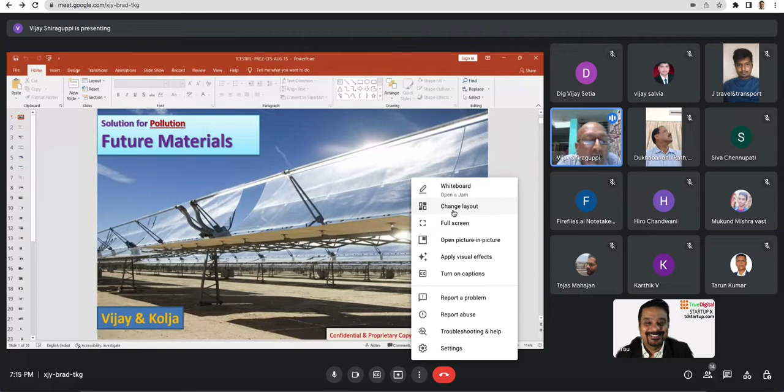Thank you, Sanju, for the introduction today. I'm glad there are three Vijays here today, including me - one is Mr. Digvijay, and one is Mr. Vijay Salvia.

Am I audible? Yes, perfectly all right. Now to start with, we are talking about the global phenomena of the worst kind happening in this world - pollution. So let me not elaborate on that. We have come up with a solution for pollution using future materials.

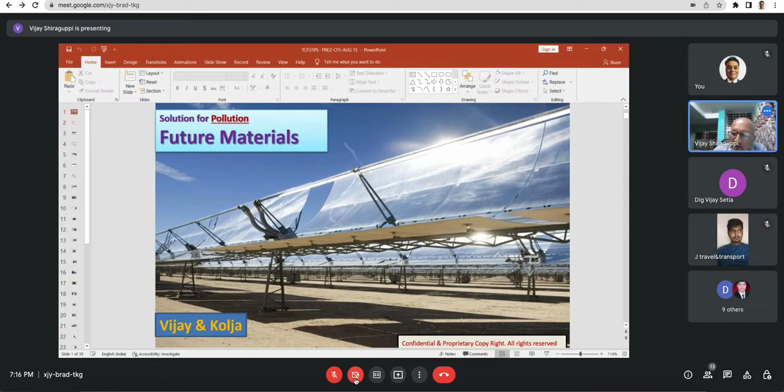So what is the problem? Polluting materials are destroying our planet, which everybody knows, and climate change - we are experiencing it currently. The solution is to reduce and replace with alternative material, natural material, low carbon material. We want it to be a sustainable solution, so we call it a 4P solution, which includes people, planet, pollution, and yet make profit. Then only it will succeed.

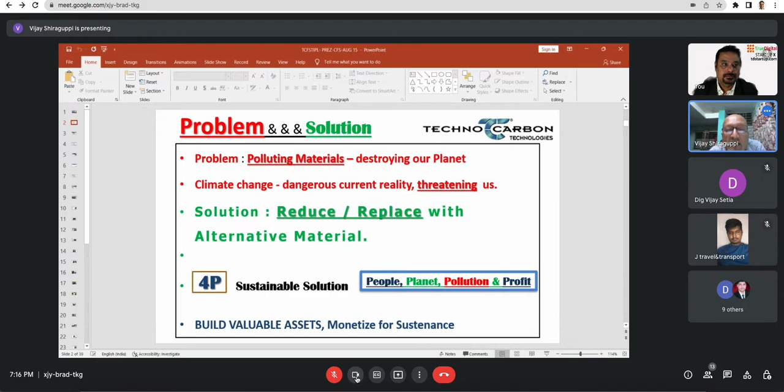So the current agreement is to save our planet, and we have to come up with environmentally friendly, sustainable solutions. We need to reduce and replace globally steel, concrete, aluminum, fossils, oil, coal, and wood with materials that are economical, low carbon, natural, and better. We don't have time now, but we have to realize we don't have an option, and we need time to commercialize.

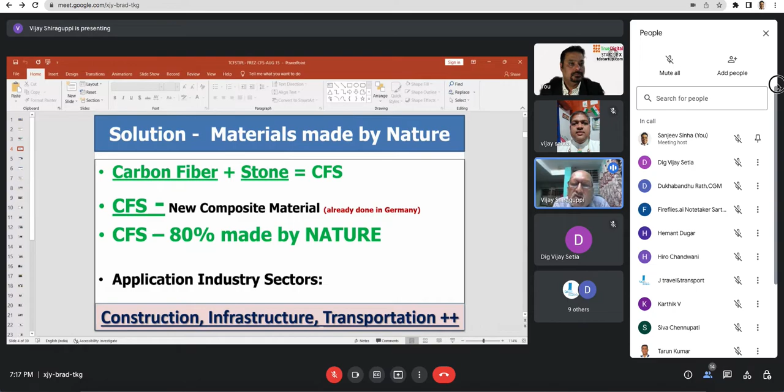So what exactly is the solution we are propagating? It's called carbon fiber plus stone, or in short, CFS. It's a new composite material already being done in Germany, and it's 80% made by nature itself, where we capture the carbon to make a material applicable in construction, infrastructure, transportation, and many other sectors.

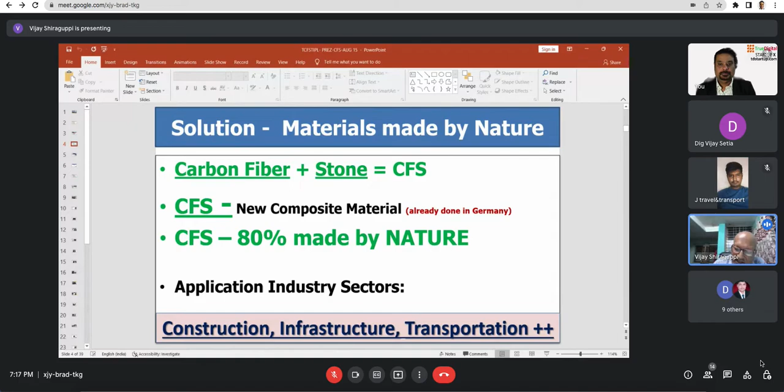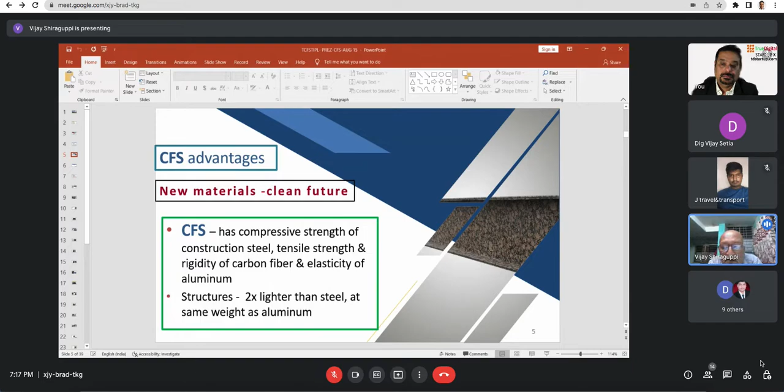So what we are saying is that carbon fiber stone is a new material that has the compressive strength of construction steel, tensile strength and rigidity of carbon fiber, and elasticity of aluminum. And the structures are 2x lighter than steel and at the same weight as aluminum.

Now carbon fiber stone, which we call the material of the 21st century, has been patented. It's a proven German technology, patented in the US, China, India, and European Union, with over 12 years of R&D and about 8 million spent across universities, German grants, and our own companies. The sale of products is ongoing. It's being handmade, so it's currently a very high cost material.

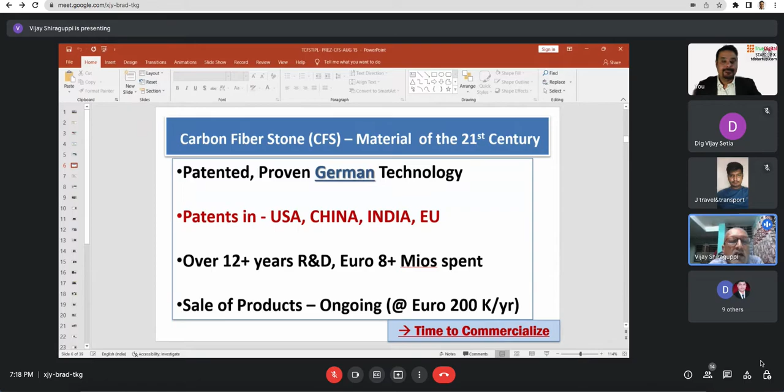Now, when I call it stone, there are some myths about it - that granite is expensive, so how will it replace steel, concrete, and plastering? We say stone is nature cured, available across the world in abundance, and it can be built and used locally, instead of relying on the polluting supply chain of iron ore, limestone, bauxite, and coal.

Carbon fiber, yes, it is not new, but it's currently very expensive. In the future, we can produce it using algae, and we have a patent for that too, but I'm not going to talk about that right now. We also have the impression that stone is brittle - we can prove otherwise. Let me start with photos, which speak louder than words.

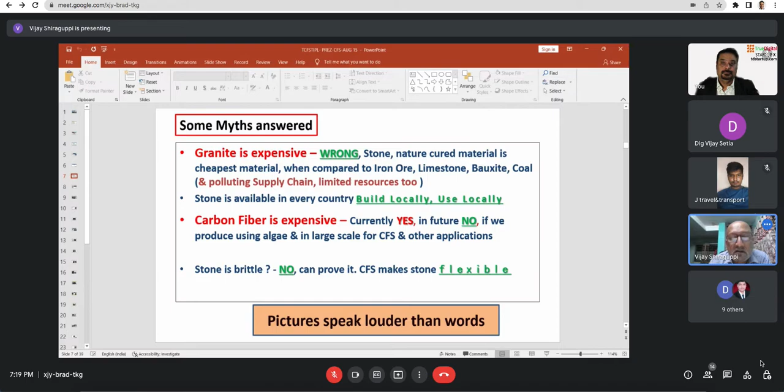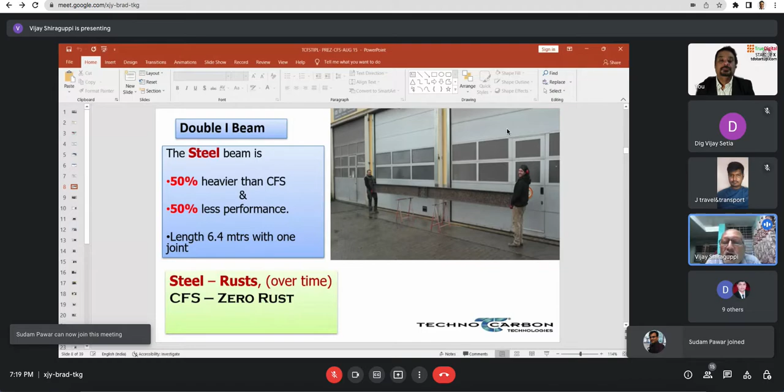This is an I-beam, double I-beam, about 6.4 meters in length, and it is 50% lighter than steel. Steel's performance is compromised because it rusts - this is a rusting steel beam, and you know when it's going to rust and bite the dust. We have this CFS beam on the right side, which is 50% less in weight and more in power.

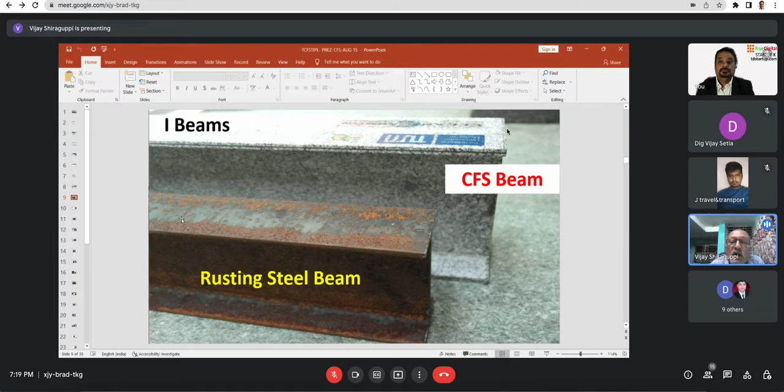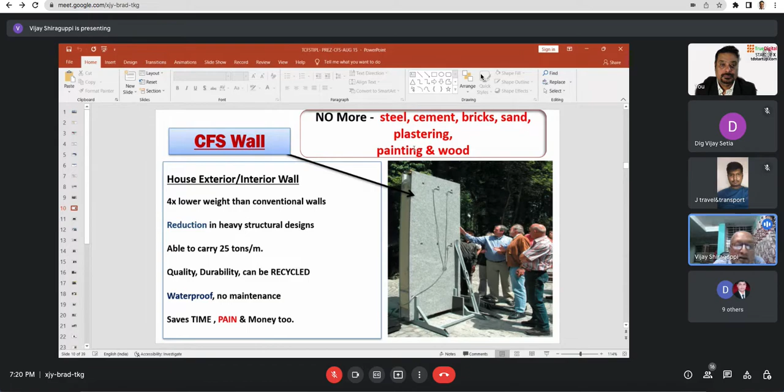Now, as you see here, this is a carbon fiber stone wall where in future we don't need steel, cement, bricks, sand, plastering, painting, and wood. At least 60-70% is covered by this material, and it's four times lesser in weight, hence lesser structural design requirements. It's able to carry about 25 tons, so 2 to 3 floors of stories can be built upon it. It's durable, can be recycled, waterproof, requires no maintenance, saves time and money, and importantly today, with labor shortage and sand shortage, it saves a big amount of pain.

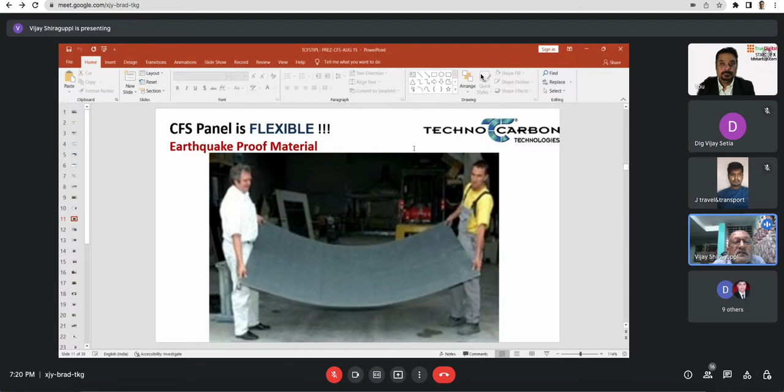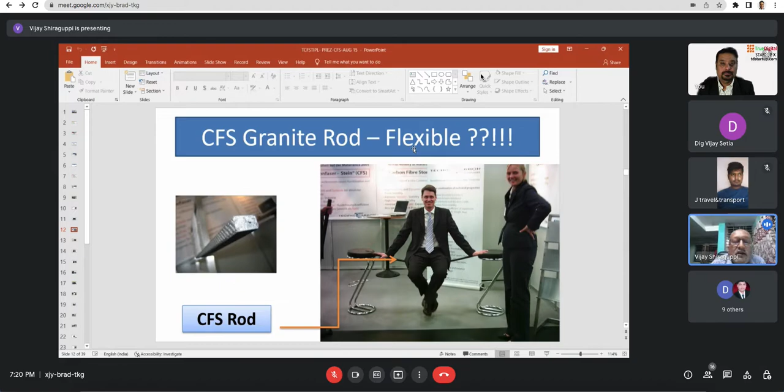Stone can be seen to be flexible, which is unimaginable, like a magician's trick. You see the rod here on which this gentleman is sitting, and it becomes again back to shape after the bend if it goes through a bend.

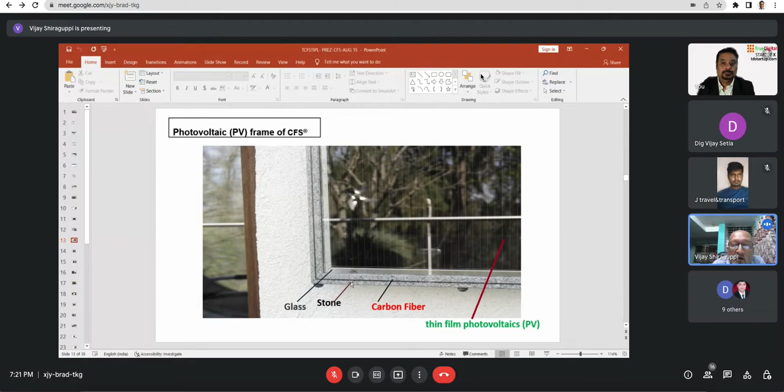Solar and everything is used in such a big way, but the steel and other metal being used can be replaced by this frame of our carbon fiber stone. You can see glass, stone, carbon fiber, and the thin film. We can also use our carbon fiber stone as the supporting structure of photovoltaic solar panels.

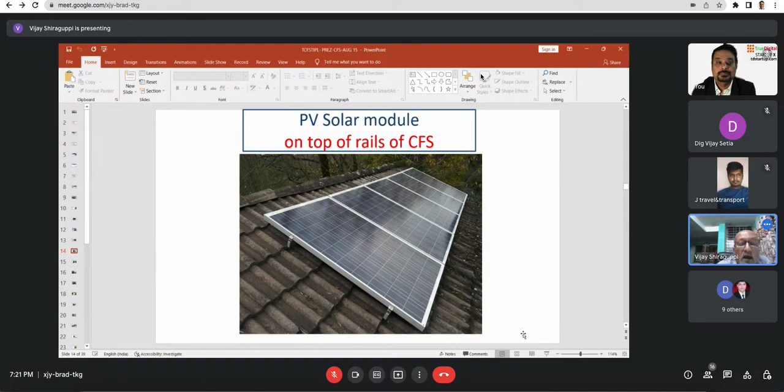This is something that measurement lances for steel industries is currently being sold. As I said, since it is not an economical way of producing in large volumes, it is expensive, but it is being sold and quite appreciated also in the steel industry.

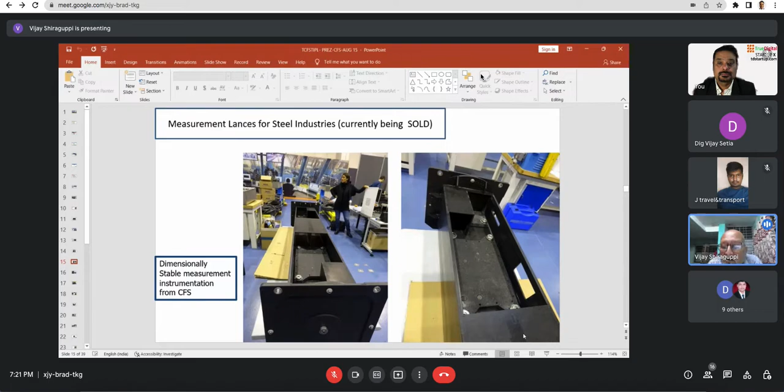My friend Siva Chandupati, who joined me from Germany on this presentation, is the founder of this technology based on our Indian Vedic sciences - SunPlower propeller, a compact wheel for air and water for both power and thrust. We are working with him to make these blades from carbon fiber stone, which he displayed in the last 2 months or so in IIT Mumbai, and before that in Paris.

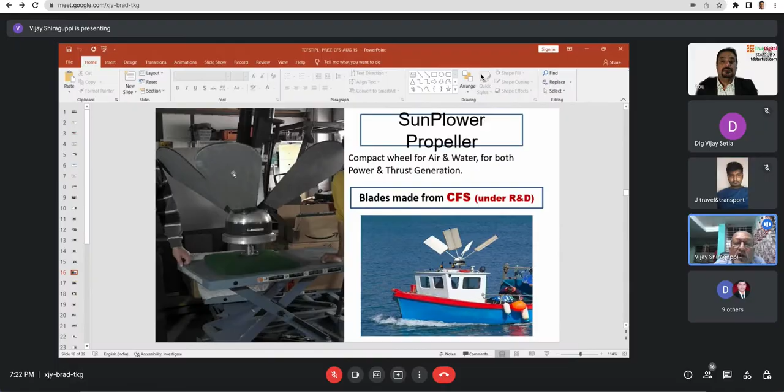These are all something that we want to show as a proof of concept.

Radiators can be built with our product, and also railway sleepers, which have already been tested to European Union Bahn, the German railway standards, which stand about more than 3 times over the SWL.

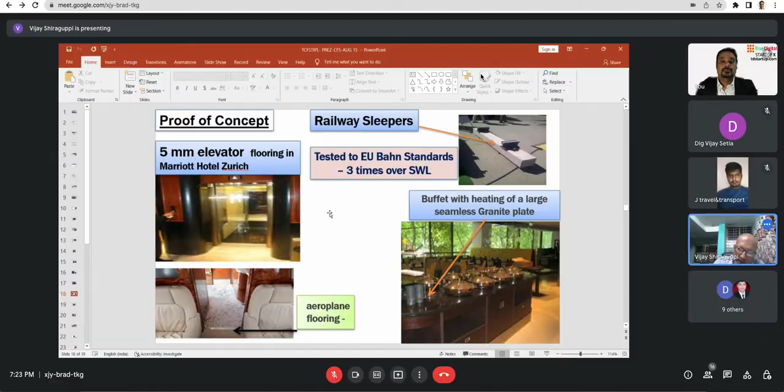You can see here in Marriott Hotel it is being used - in aeroplanes, and one more interesting application is in hotels, using directly the stone surface for heating.

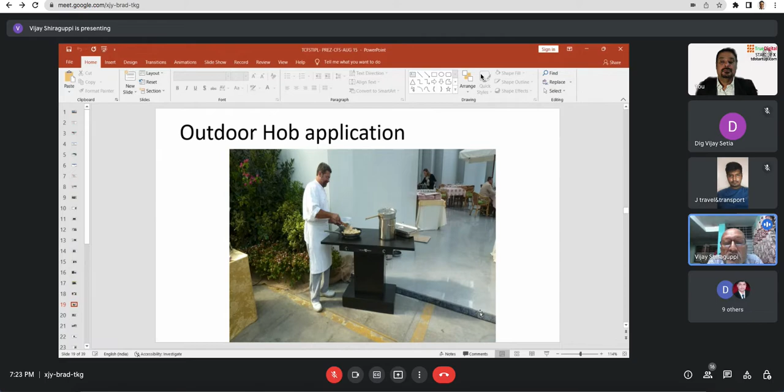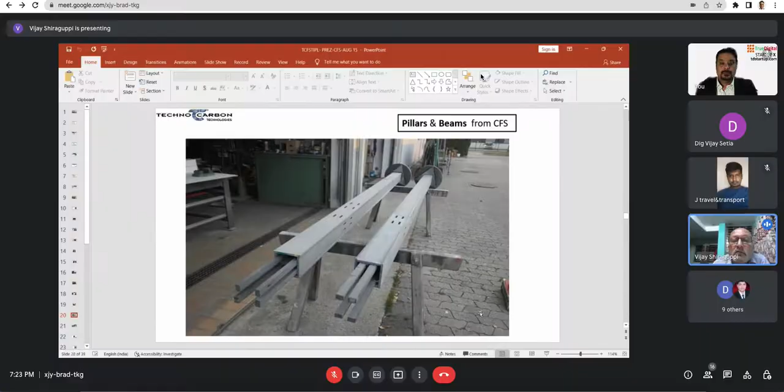These are pillars and beams from carbon fiber stone being made. This was the structure before, and now after we made this an experimental building using CFS for the flooring, pillars, and beams.

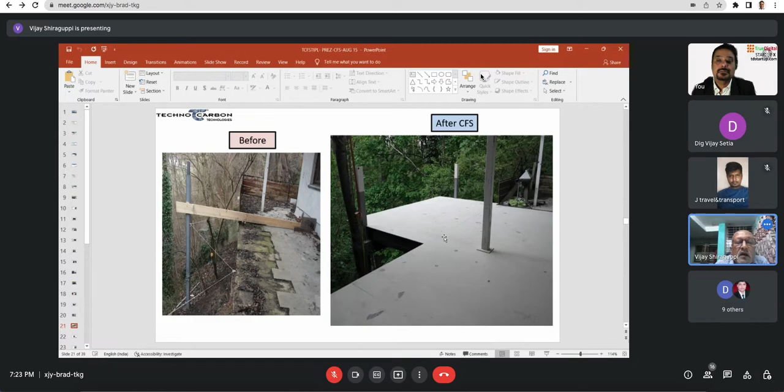Now this is another new material in the market, especially on the subject of the current global energy crisis for winter in the entire European and other cold countries. Electrical watt heating with long wave radiation and on-demand switching - it's 1 mm thin black granite with an E-conductive carbon layer.

This is being done and used by my founder friend Mr. Kolyak, who could not be present today at this presentation. It has very low electricity consumption - I have more details on this, and it's very cost effective.

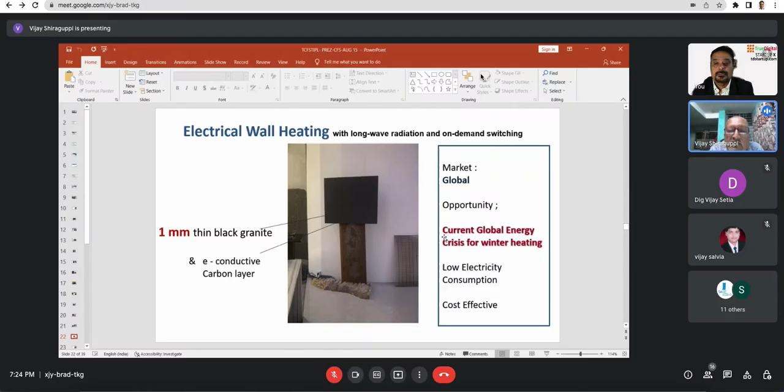One more thing that will replace plastics in a big way is a non-breaking flexible back cover for cell phones, made of 1 mm pre-stressed granite.

Now we have sources in India - sun, sea, stone. Why sea is required is the next subject, but yes, that also works at a later stage for the carbon fiber production. And stone is cheap and in plenty.

Anything else comes for free. Of course, we do produce a lot of carbon dioxide, which is free of cost. And land, yes, we have across the country. Raw material, yes, across the country. Labor, yes - skilled, semi-skilled, and at economical cost compared to American or European standards of labor wages. Subsidies from the Indian government, yes. Business model can be business to government, business to customer, business to business, and our team is ready.

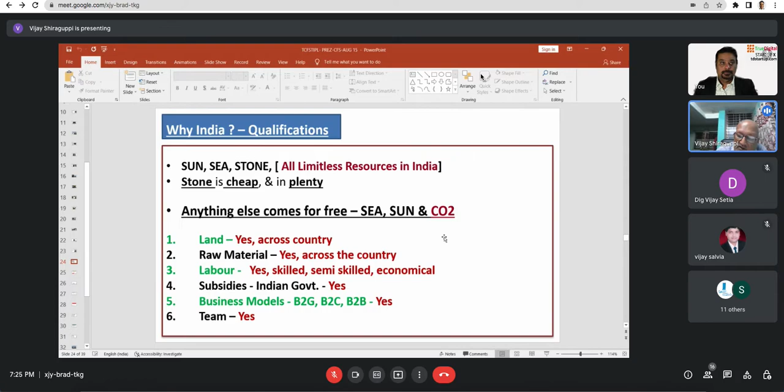Now just to give you an idea about the global market for CFS - construction sector, as what I gathered from Google, is about $13 trillion a year. Housing sector itself is 4 trillion, and infrastructure is about 3 trillion. So if you take 5%, it will be 1 trillion over a period of time.

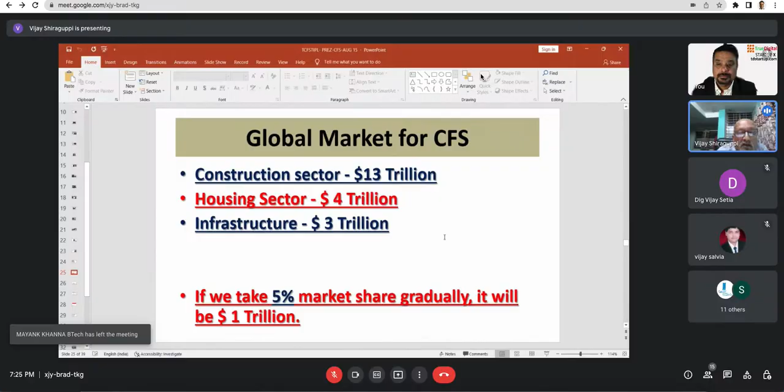Market, because we have to address the Indian market first - from the sources that I have, it's going to be about $600 billion, with a compounded annual growth rate of 6%. Some place it at 4, talking about 390. So we are taking even 0.01% of the market share.

It is 50 million. So for my basic calculations, I've taken it to be 10 million for first year operations - not even 10 million, maybe 7 to 8 million US dollars. Square foot construction in India is about 43 million square foot per year, so I am assuming only about 5 lakh square foot or 500,000 square foot for my first year operations.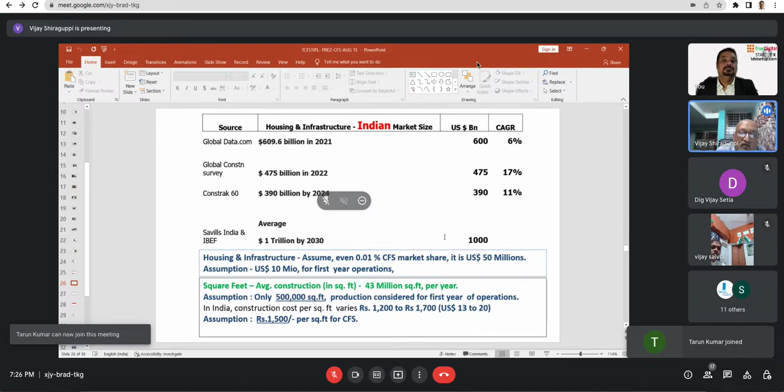The construction cost per square foot in India is about 1,200 to 1,700 rupees per square feet. I am assuming a moderate rate of 1,500, but with better quality material. So the financial projections - compared to my last presentation, we have reduced the investment amount, because we thought we will not go into supplying or procuring granite and cutting it - we'll rather buy it also.

Investment for the assembly plant only is about 65 crores. We expect equity to be almost 50% of it, with debt in terms of other ways. And you can see the EBITDA that we are going to generate.

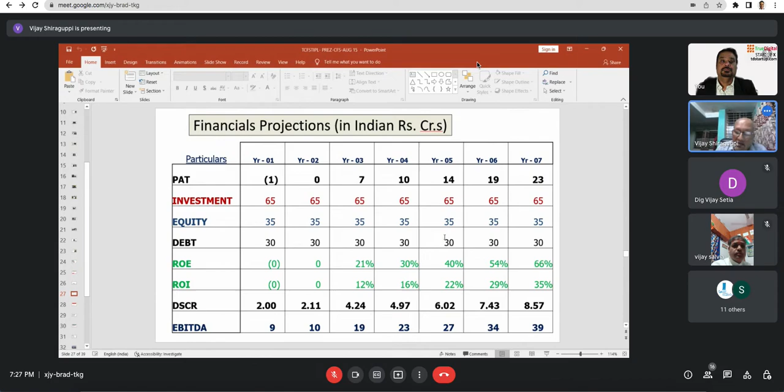Investments, of course, this comes to financials. We can always discuss it at a later stage if somebody is really interested. And what is the competition now?

We have no competition on a commercial scale, and we have identified all the resources and people that are required to be there. We can do it in less than 12 to 18 months.

We focus on a particular sector, because carbon fiber stone is applicable across so many sectors, but housing infrastructure is so huge and it's easier to kickstart. Other sectors like railway, shipping, and aviation take time to market because of testing, certifications, and high value components in consonance with DRDO or ISRO. So we are focusing on the market of housing.

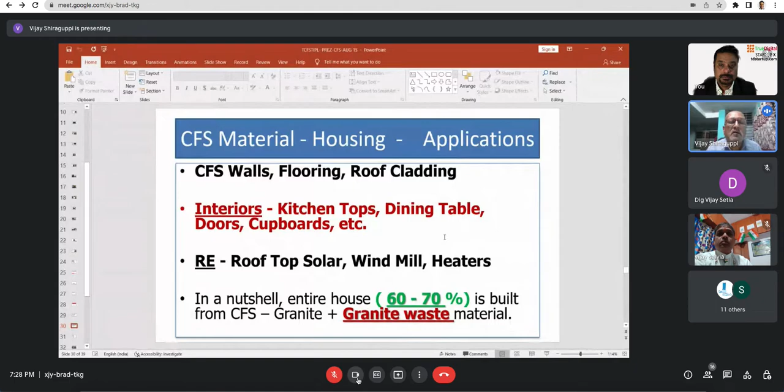Why housing? Because 60-70% of the house is now where we see we are available everywhere. We have carbon fiber walls, flooring, roof cladding, dining tables, doors, cupboards, and renewable energy applications like rooftop solar, windmills, and heaters. In a nutshell, since I'm addressing a larger market with larger applicable products, I'm looking at housing as the area to start with.

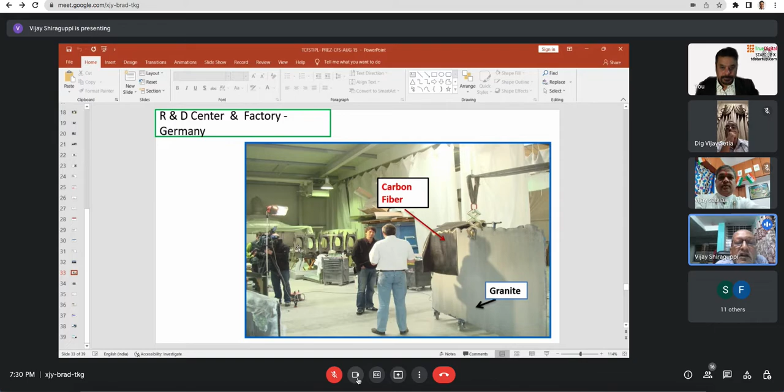So the mixing of these two, carbon fiber plus granite as a stone, is what we call carbon fiber stone, the new alternative material that we are propagating. You can see the bending tests and all have been done.

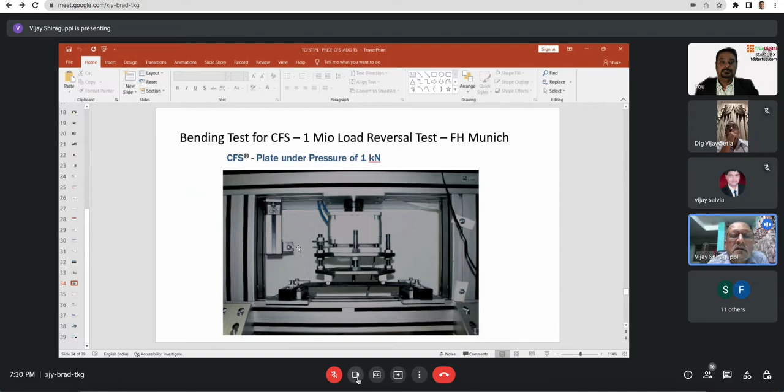There are many illustrations that I can present. So what we have estimated is positive on that front.

We have estimated about 65 crores, approximately 7 to 8 million euros in India, to set up a 5 lakh square feet facility. And we seek an ask of 4 to 5 million euros equity investment, with the balance amount to be discussed with the investor.

Whether interested to go by debt or other routes via gap funding, government subsidies, or security deposits from various other people.

This project can be done across the globe in many countries. We can save our planet, yet make a profit, produce a valuable material, and expand globally as time goes by.

And of course, we don't have the funds, so we can only offer equity. Whatever percentage the investors are interested in, we will discuss with them the company structure, shareholding pattern, and the first right of refusal with interested investors.

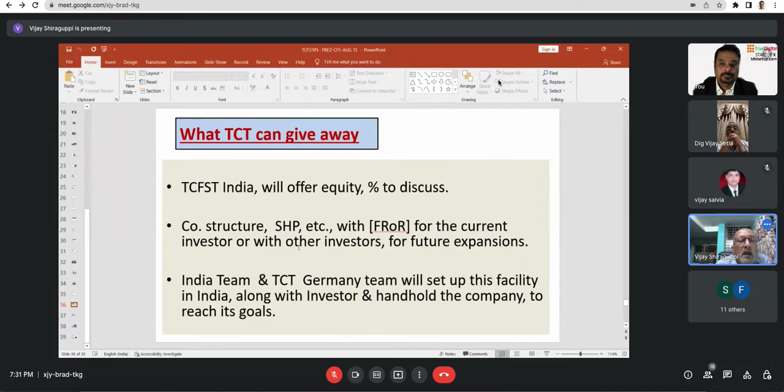My team in India, along with Germany, will set up this facility, run it, and handhold the company to reach its goals. So this is the team that we currently have. There are many more people involved.

This is what I mean by the future of a world for people, planet, pollution, and profit. Carbon fiber stone is one big answer against everybody running around the issue.

But this is one thing which will help us reduce the use of polluting materials in a big way over a period of time. Of course, it will disrupt the market, but yes, that's our answer to it. Thank you.

We have seen COVID-19 lock up and shut everything. Climate change now could be the knockout blow. We are running out of time. Me, Sanju, Digvijay, Vijay, everybody were in the same boat. We don't have any option.